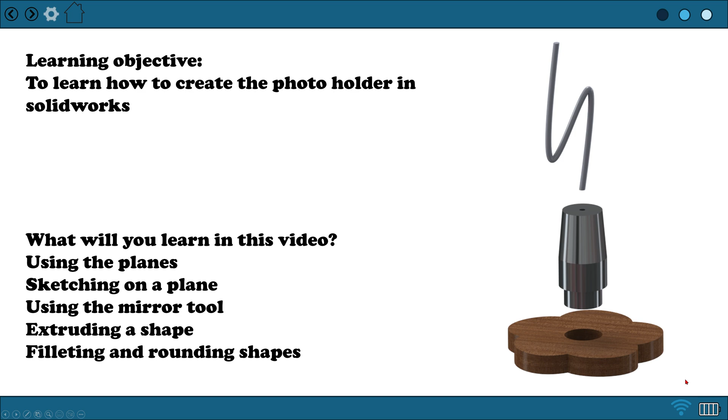So we're going to be using the planes. I'm going to show you how to sketch on a plane, how to use the mirror tool, extruding a shape, filleting and rounding shapes as well. So that is all in this video, just the base for this one, and then we'll look at the others in the next videos.

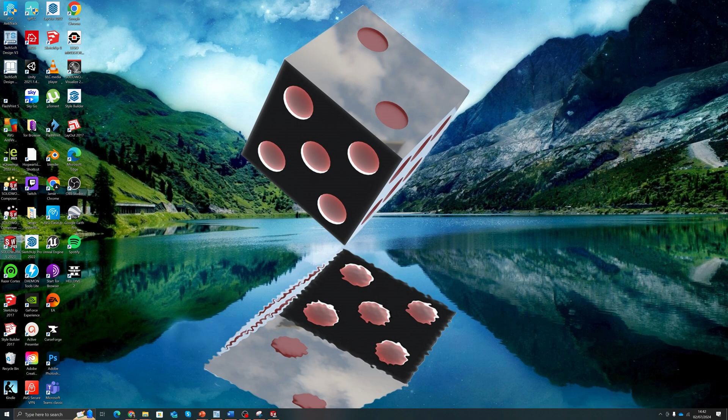Okay, so the first thing you want to do is open up the software called SolidWorks. It looks like this when it's opened. If you can't find SolidWorks, you need to look on your desktop. You'll see one that looks like SW within a cube, and it's normally called SolidWorks 2023, 2024, or 2025 - they upgrade each year.

When you open it, you'll get part, assembly and drawing. For this, we're going to design a part, and in later videos we'll have a look at assembly and drawings, but for this you need to open part. So select part, click OK.

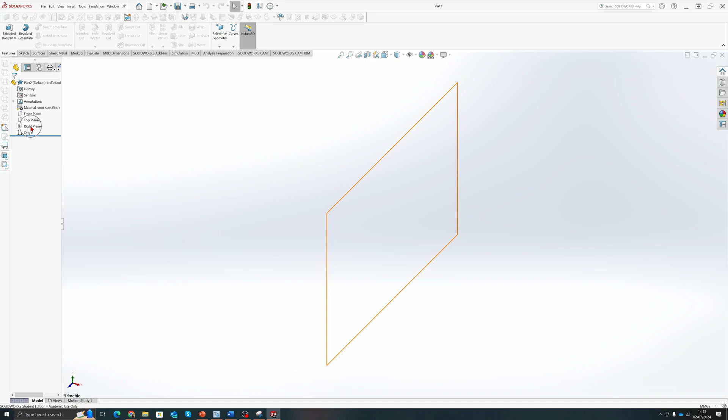When this opens, you'll see that there is a blank space. This is our designing space. On the left side, I want to draw your attention to the different planes. There are the front, the top and the right plane. Now we will use these different planes for different things. Imagine them as pieces of paper basically that go almost infinite length. Okay, so this plane here will travel forever to the left, but it is a space to start drawing on.

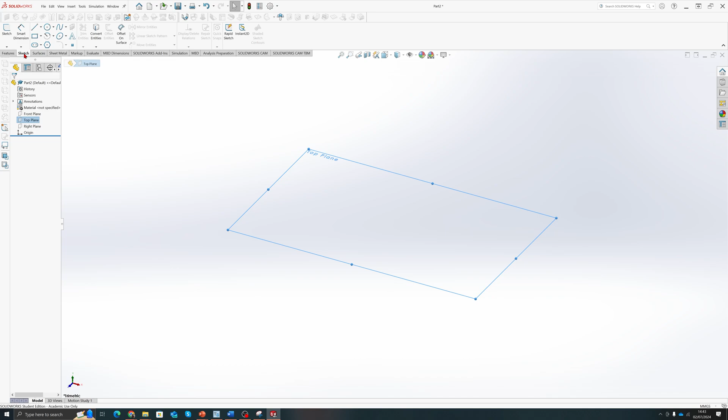For us, because we're going to draw the base and then extrude it upwards, we're going to start on the top plane. So if I click on that, you want to select that and then click on the one that says sketch - here a little symbol appears. The alternative is click on sketch, and you can click on the sketch button here as well if you prefer. What will happen is the camera will rotate and then look down at this blue box here.

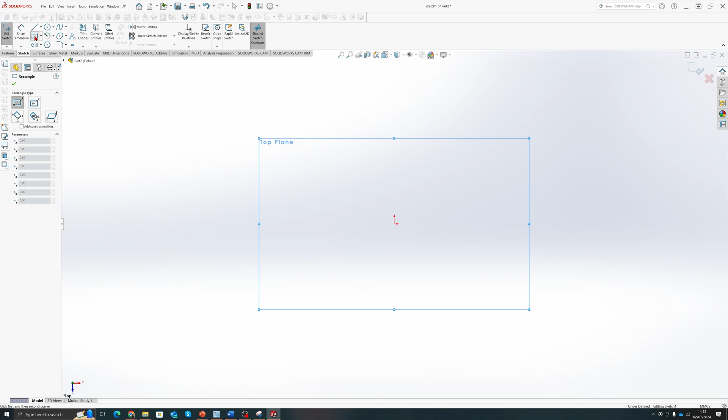Now this, we imagine, is like a piece of paper. It is 3D, and I'll show you how to rotate the camera afterwards, but you want to be looking at it in this sense. Now what we want to do is draw a rectangle using our rectangle tool that you can see over here. I'm just going to draw this wherever at the moment. It doesn't matter if it stays within the box, but it doesn't need to be massive because we're actually going to change the size of it now.

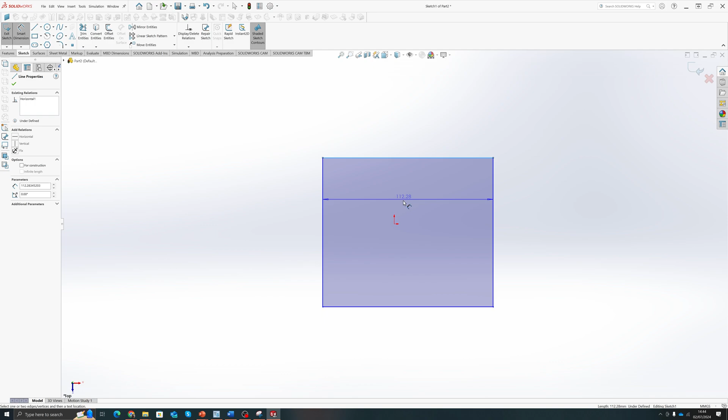Next, what we do is the Smart Dimension. Click Smart Dimension, then select one of the lines. You can see I've hovered over the line because it changes to orange. Click once - you'll see that the dimension then moves with the mouse. When I click again, it places that dimension. Now here you can see that this is currently 112 point etc. millimeters. What we want to do is delete that and change that to 100 and then push enter.

And we're going to do the same for the left side as well. So if I do that, what now happens is that this is telling SolidWorks that these lines are 100 millimeters. You can do it on all of them if you want to, but you don't need to, because it comes up saying that this is over defined. What that means is you've got two dimensions, and if I put a dimension here, it has to be 100, otherwise this dimension here can't be 100. So you can leave it like that.

Now as you can see, I can rotate this. To rotate it, you use your middle mouse - that's the one that's in between the left and the right mouse buttons.

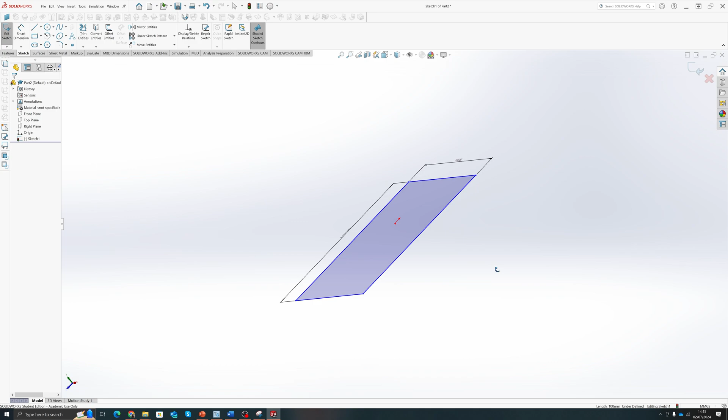You can click that in, and it allows you to rotate the camera and rotate your work so you can see it in a different view. At the moment, even though it looks 3D, it's actually got no thickness to it - it's zero thickness.

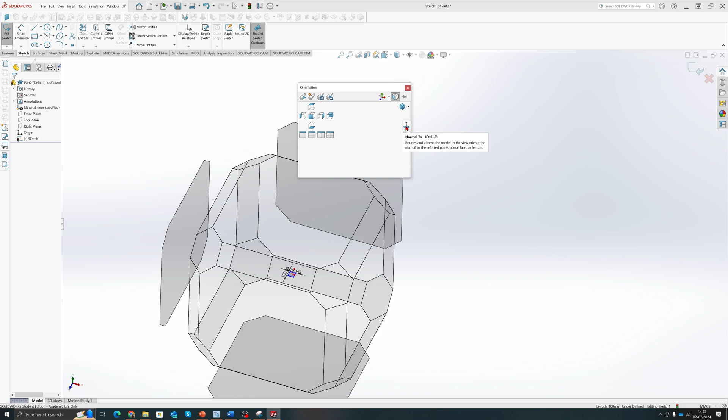Now that we've moved that around, if I push the space bar, you can see it zooms out. If I click on this one that looks like a little square shape with an arrow pointing up, that's called Normal To. We use that probably the most out of all of them. If you click that, it takes us back to looking at our work again. Same as in 2D design and other software, if you scroll the mouse wheel forwards and backwards, you can zoom in and out, so you can navigate yourself around this.

Now what we want to do is add our design within this shape, because this is the size of the plywood that we gave you for the base of your photo holder. So now we can do our design within this.

So what we can do is, say if I wanted to do a circle shape, I could go down to the bottom of the middle line here and it goes orange. If I do that, it gives me a line going up. If I did the same from the right side as well, if I find that middle point, it likes to lock onto it. If I then move over to here, it will show me where the two middle points of those two lines are.

I could then draw that out, and then I could have that as like a cylindrical base if I wanted to. It's a little bit basic, so I'm going to show you a more complex one.

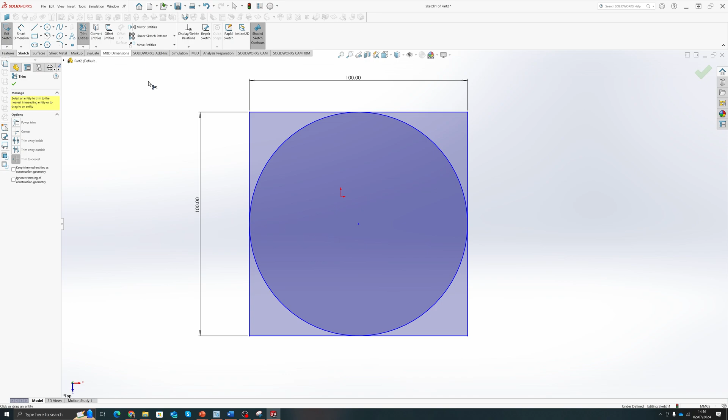If I wanted to do something a little bit more complex, let's say if I wanted to do a star, for example, what I can do is put a line down the middle - you'll see why I do that in a second.

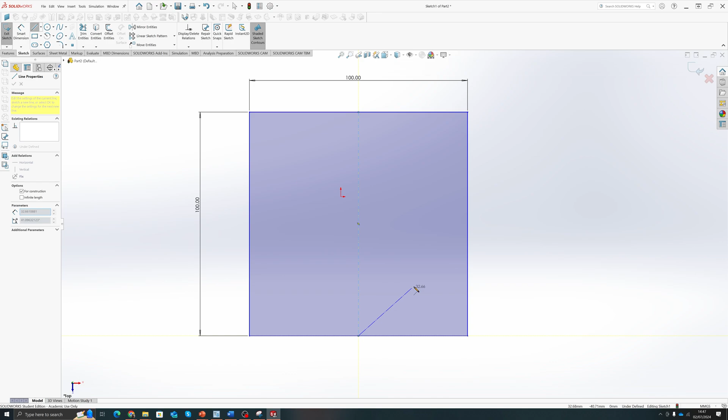With that line, I'm going to make it a construction line. I'm going to draw a line that goes straight down, and then click. If that line keeps following me, I can push escape, which is at the top left of your keyboard. That gives me a reference point.

So let's say, for example, if I wanted my star to go down like so, and then I might want it to have a point that goes off like so, might go down like there, might have it go to there, and then I might have it go from this point here over to this point here. If I now push escape, same as we did before, I can actually move these points around a little bit to give me that different shape for my star if I'm not quite happy with the shapes.

So I'll make it a little bit of a different shape. Again, you can sort of play around with them like so.

Now you probably noticed that I only drew half the star, and the reason for that is because I want to show you how to draw using the mirror tool.

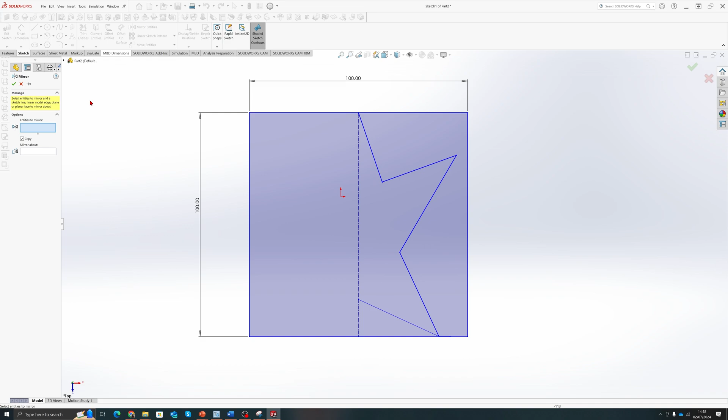So what this allows us to do, if I move that there, if I now click mirror entities - entities here is basically what do you want to mirror. Well, I want to mirror all these lines here, and then the next box is this one which says mirror about. This is saying where is your line of symmetry basically - so that is my middle line here that we did as a construction. I can then push the green tick, and what it does is it mirrors those across.

Now, yeah, you could draw them, but the idea with this is now if I move this, it actually moves them on both sides. So it makes designing much easier, and it means we can make sure these are symmetrical and we're happy with the positioning of them all.

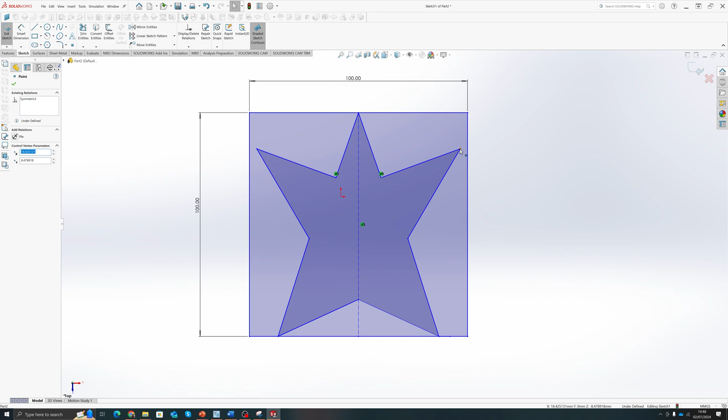As long as your line of symmetry is in the middle, this should then be centered. I could line that up right to the edge there if I want to, and then I can move my star like so.

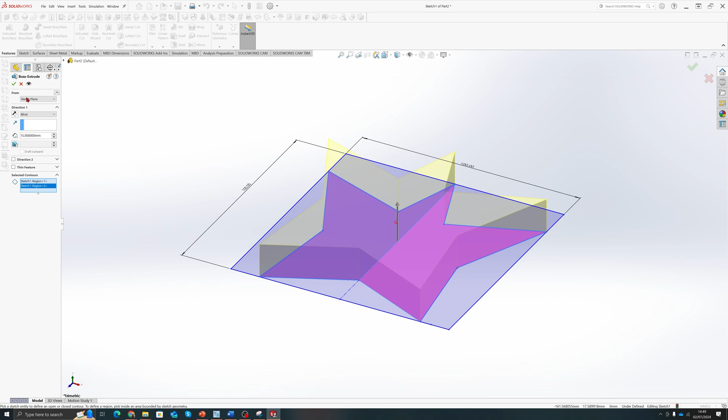Now, if I want to make that 3D, I go to Features at the top left, click Extrude, and choose how thick I want it to be and what I want to extrude. So I'll select both halves of the star, and make the thickness match our material. The thickness of our plywood was 15, so we'll make it 15 millimeters. Green tick, like so.

And then we've got our star shape. Again, I can rotate it to see it. If I wanted to edit that for whatever reason, click this little arrow here, and you can see the sketch. If I click that and choose the button that says Edit Sketch, hover over it, click, and it will be Edit Sketch.

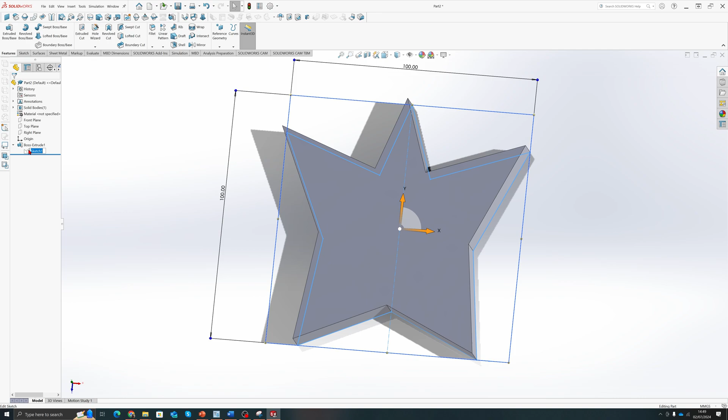You can also do it by clicking within here, and then clicking on Sketch within that as well, so you can edit the sketch. The idea is that you can edit what you've drawn, and if I move this, it's going to change my extrusion as well. So just be mindful not to change your sketches too much, otherwise your extrude won't work.

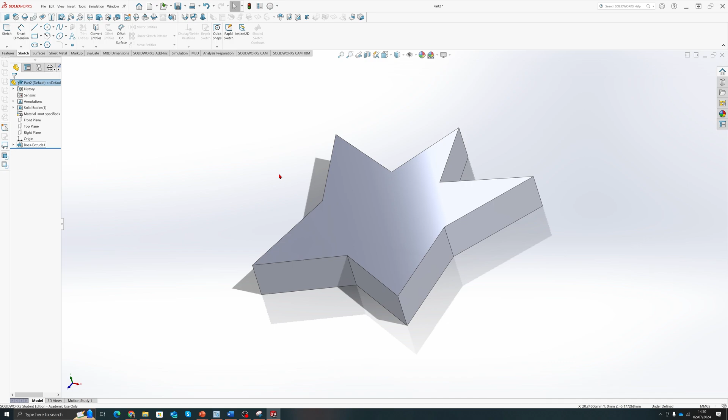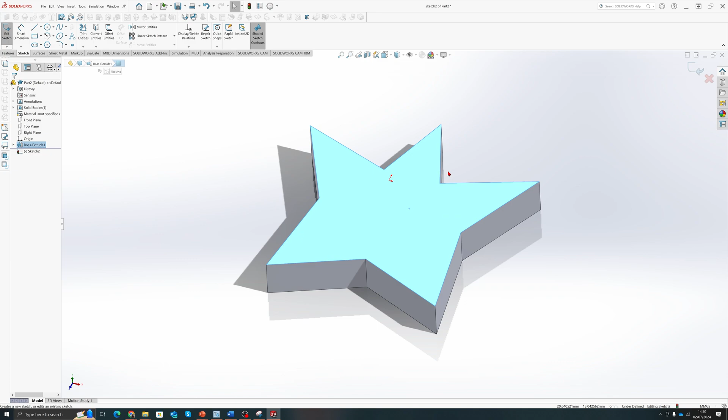The next bit is we actually added a hole that we drilled with the Forstner bit. So if I click on a flat surface - and this is a helpful tip within SolidWorks, you can draw on any plane or flat surface - you see my little toolbox appears. Click on the one that says sketch. Now I'm going to press spacebar, same as before, normal to.

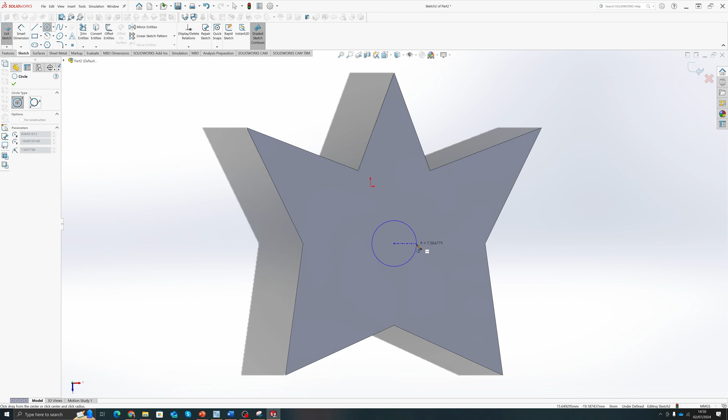That will line up so I'm looking at the top of my design. I'm then going to put my circle, and I want it to be in the middle of this point and this point here. So I hover along them, and because I've highlighted them, it should allow me to locate the middle. I'll draw that out. We're going to set this to be 20 millimeters because that's the size of the Forstner bit we used.

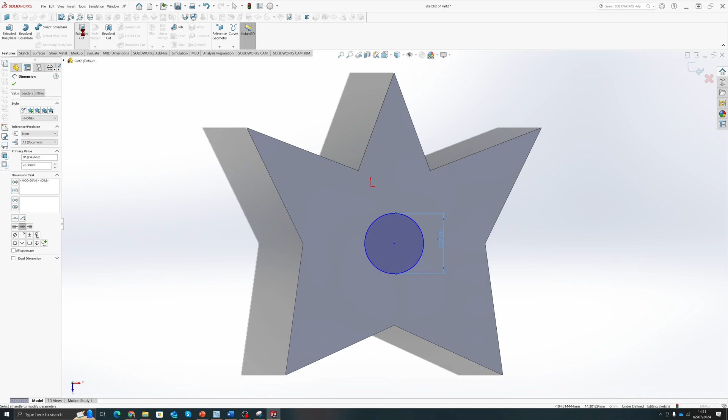The difference here, and you have to pay attention to this, is we go back to Features, but this time we're not going to use extrude. Loads and loads of people do this - they add an extrude, and basically that just adds material to something that's already there. We don't want that. What we want is extrude cut, which takes away material. So if I click extrude cut, and rotate my camera around, you can see it's got this yellow shape, demoing and showing what it's going to cut through.

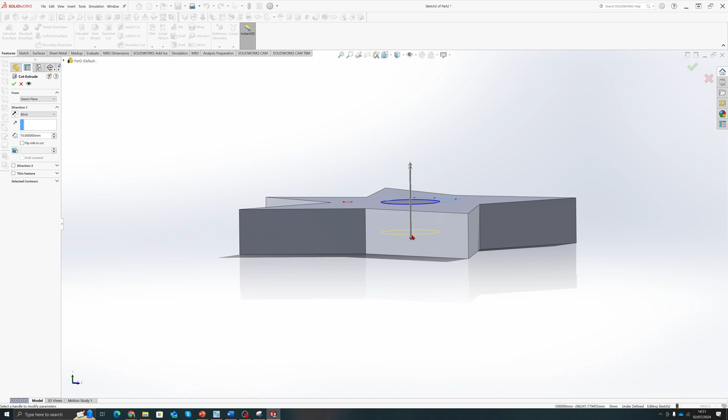If I did it like that, it's going to cut all the way through, but I don't want it to cut all the way through - I want it to go down about 10 millimeters, so about there. You can always drag these grey arrows, or you can type it in here. So 10 millimeters, green tick, and then we've got our base shape there.

So save that - file, save as, save it in your documents, and make sure to save it as your base so you know what it is, and save it in your folder so we can come back to this one. I'll call this base because we will need that later.